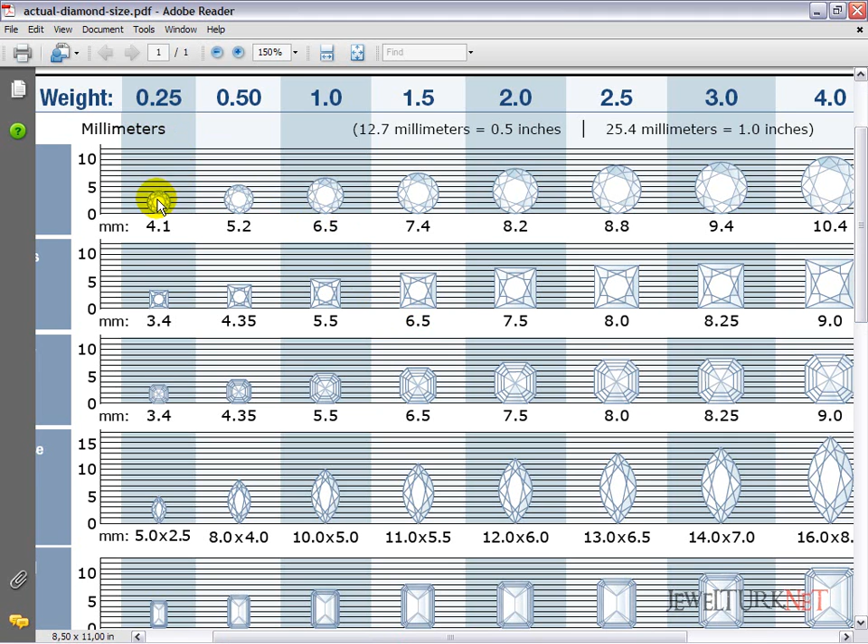First of all, we are going to use a quarter carat diamond. Its diameter is 4.1 millimeters. Here are diamonds, let's measure it. You see that it's 4.1 millimeter. Select the gemstone and hide it.

Open the front view. Open the snap button and take a point. We are going to mark the center of the work plane. Here is the center of the work plane. We can put the point to here. Now we can close the snap.

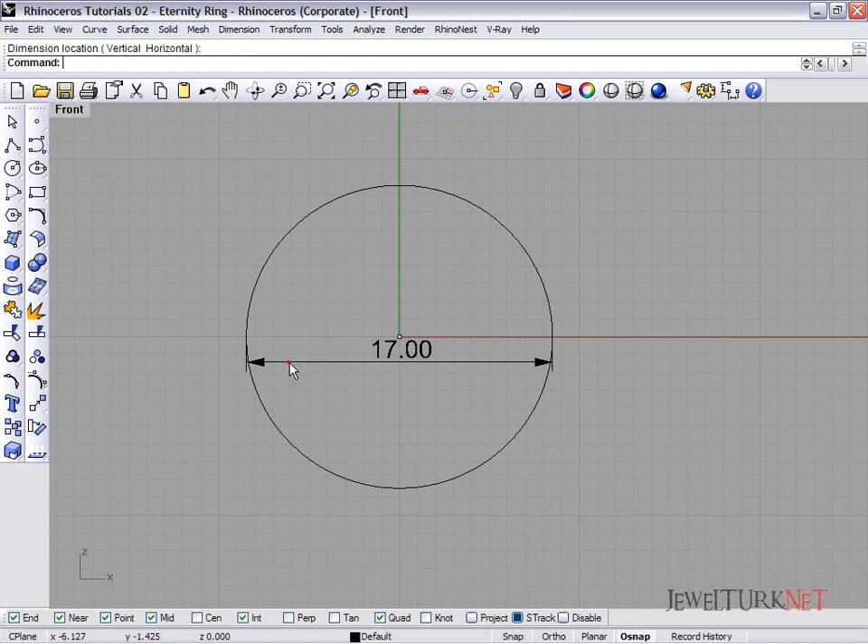Take a circle. Select the point and now draw about a 17 millimeter diameter circle. Select the circle. Offset it about 4 millimeters. Select the circle and offset it about 4 millimeters.

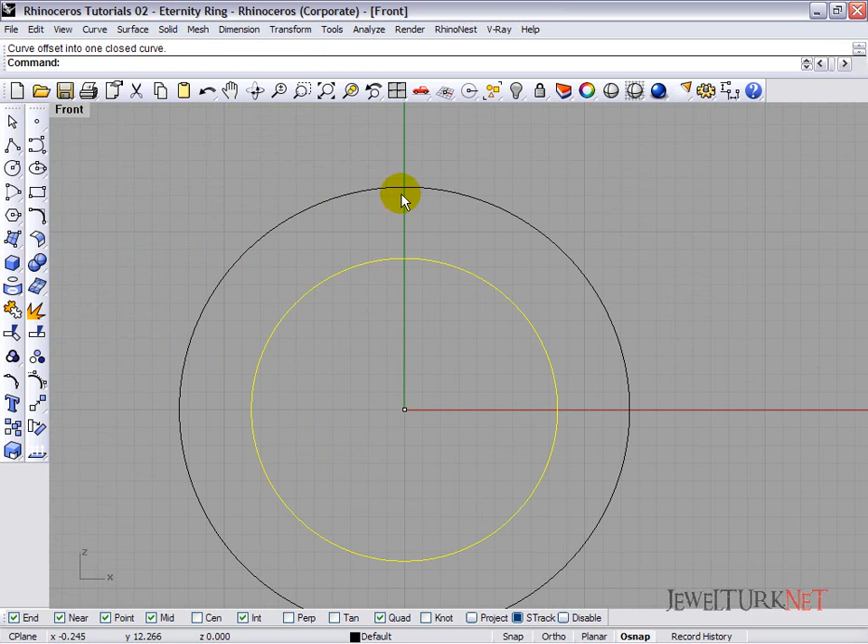Now show the gemstone, put the gemstone here, and then hide the gemstone again. Put a point to the quarter of the second circle and now we can delete this.

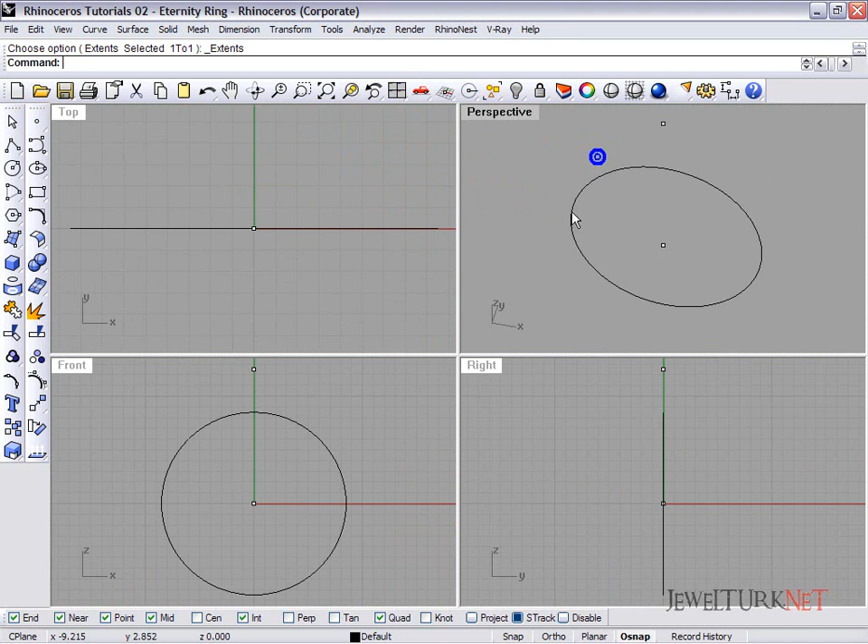Open top view menu, select circle, and draw from here a 4.1 millimeter circle. You can see that this diameter is equal to the diamond's diameter.

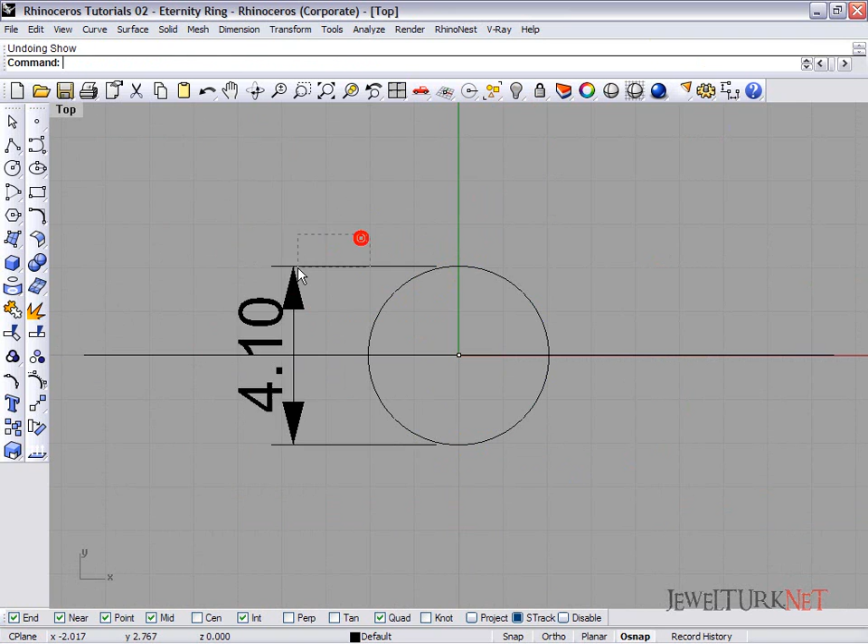Select the circle, click offset, and offset it about 0.2 millimeters. Now we can delete the first circle. Our prongs will start from the inner circle.

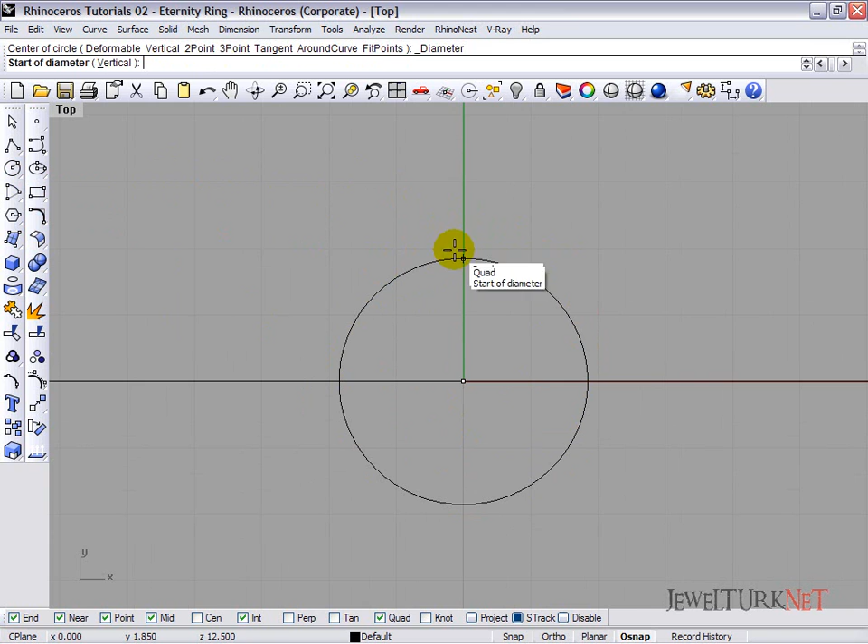Select the circle and write about 1.3 millimeters. Open center button and click point, and put a point to the center of the circle. Now we can close this center button.

Select this circle and point and click rotate. The center of the rotation will be the center of the work plane. It's about 45 degrees rotated.

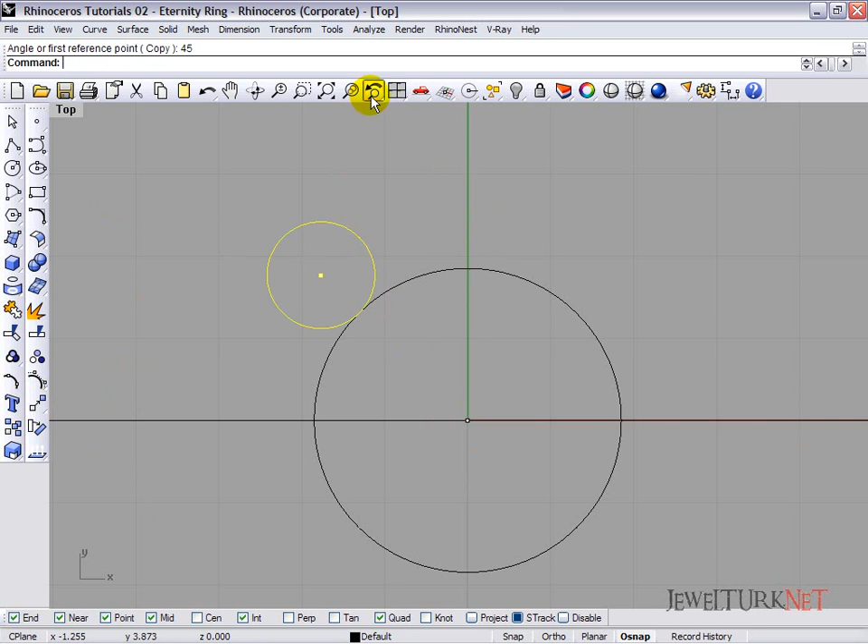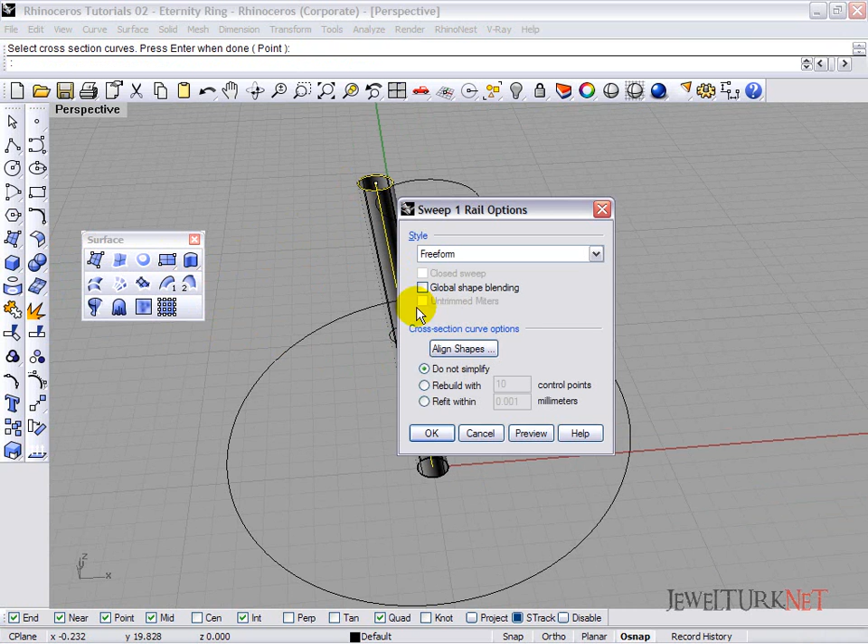Open the perspective view. Select line and click this point to this point. Now select this line. Open surface menu, select one rail with the circle. You see that it's a surface now.

Open solid tools menu, click the surface, then cap planar holes. Now it's a poly surface. Now one prong is ready, but we need at least 4 prongs.

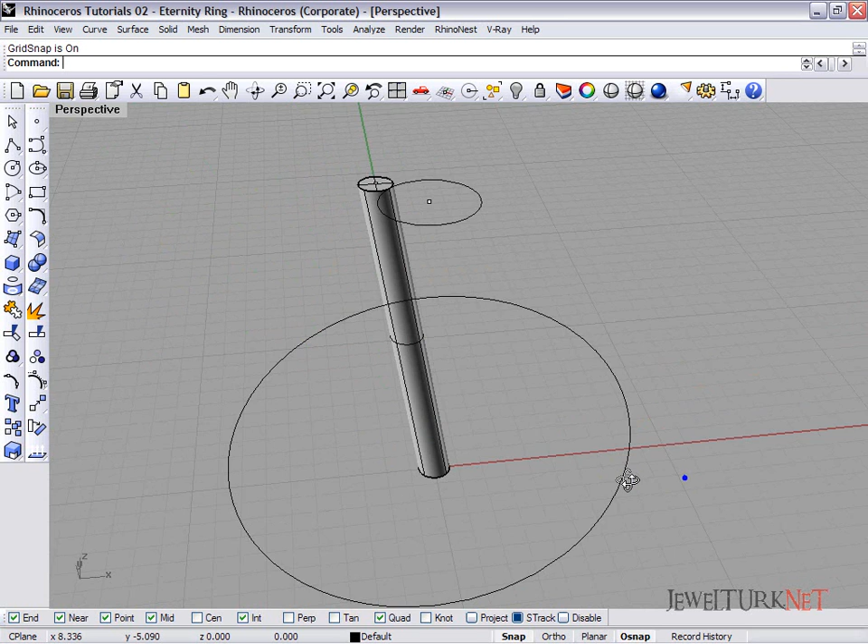Select this prong. Open the top view and click polar array. The center of the polar array will be this point. Number of items will be 4. Yes, here are 4 prongs.

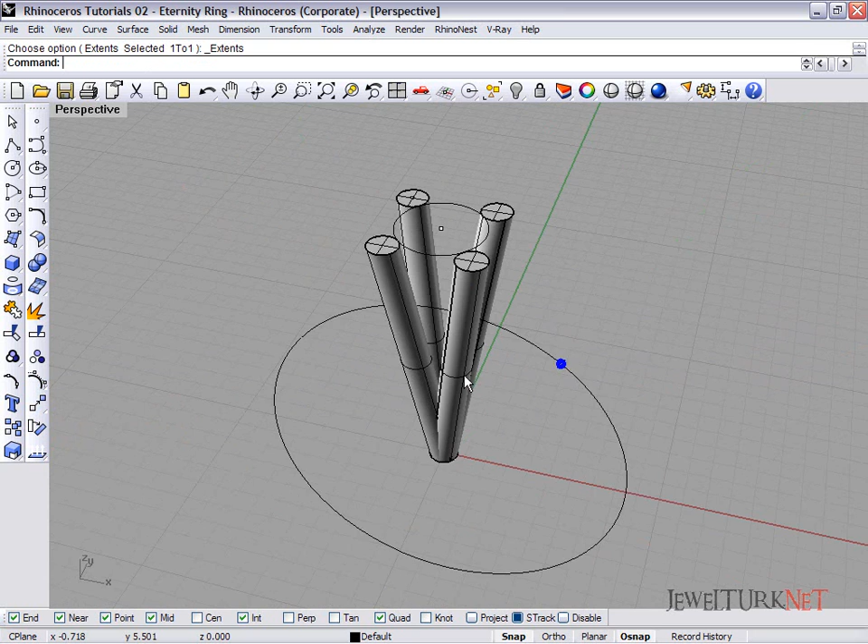And now we are going to do the support part. Open the front view, select the circle, click offset, and offset it about 1.7 millimeters. And now we can select the prongs and hide it.

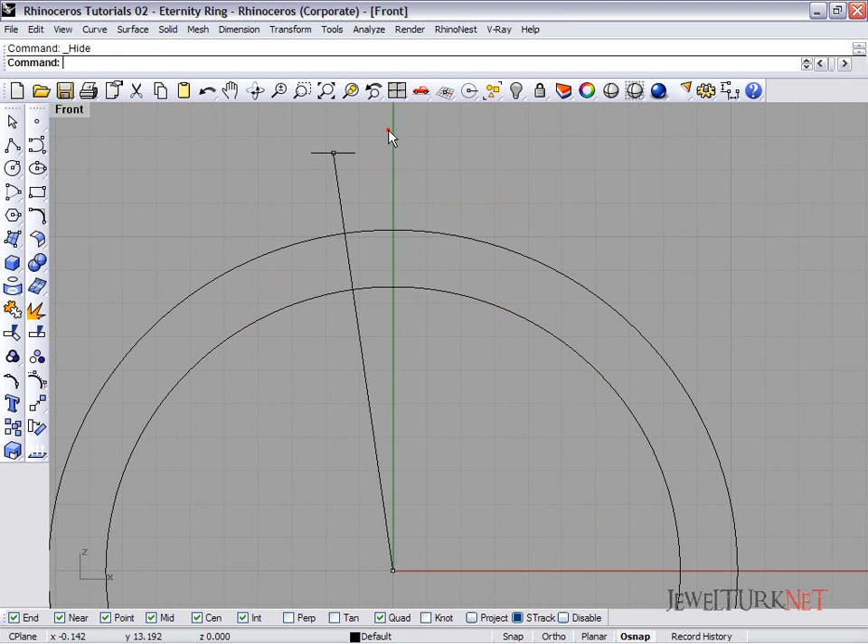We can delete these lines. Select the circle, show the prongs but select the gemstone. Select the circle, select the quarter of the upper circle, and then open top view.

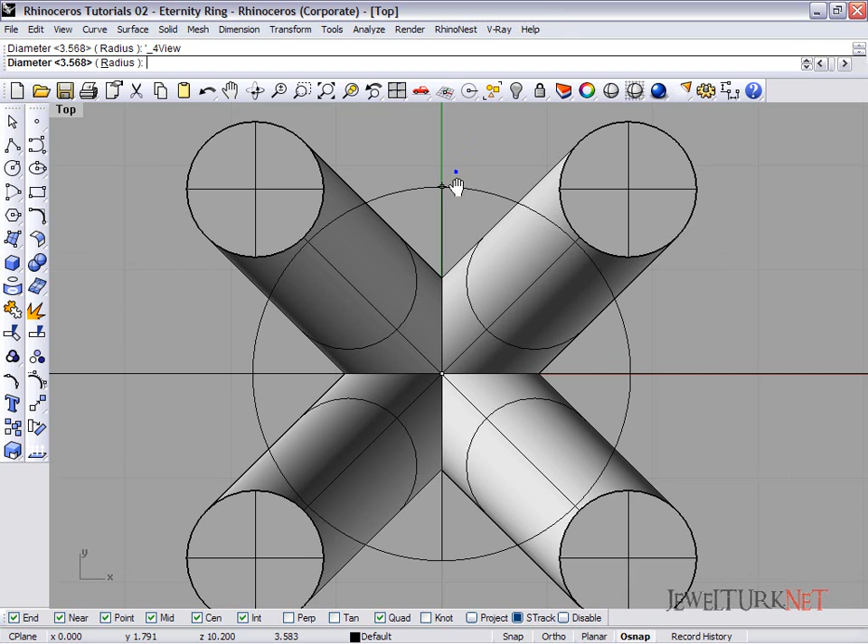We can click shift to make ortho button or ortho operation. Click about the circle, let's look about it. Yes, it's nice. Select the circle

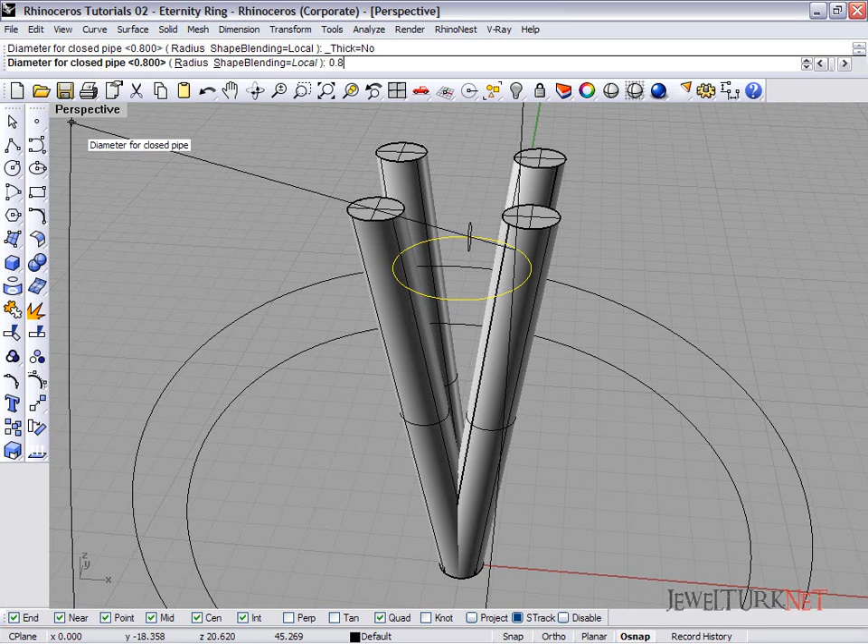and click pipe. Its diameter will be 0.8 millimeters. Show the gemstone, yes, it's very nice. And then we can delete the circle.

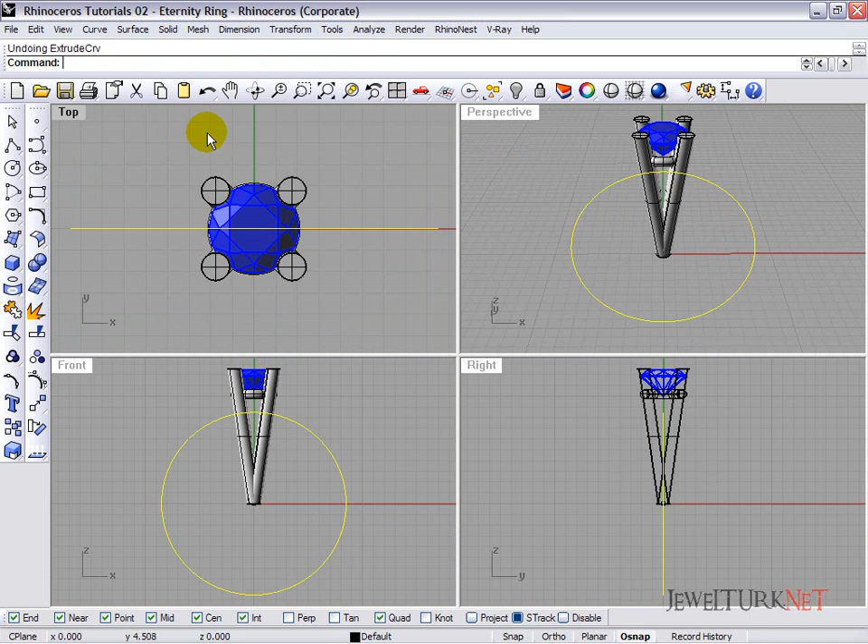Select the circle, open front view, and extrude it. When you are extruding, please be careful. Select both sides, yes, and cap button, yes.

Select all things except this one, the cylinder, and click Boolean difference from the prongs.

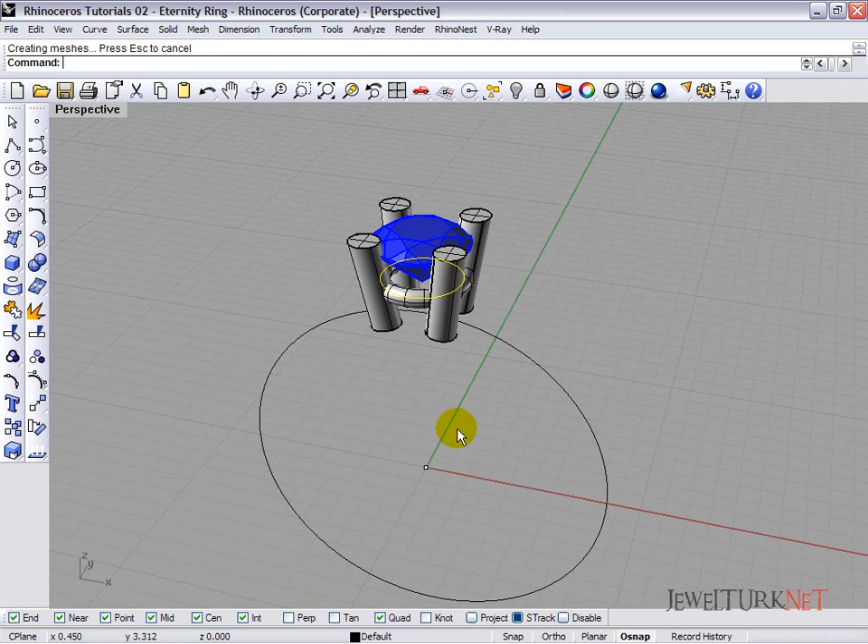Click four views, open the front view, and then select these parts. Open transform menu and select polar array. The center of the polar array will be the center of the work plane at here, and the number of items will be 16.

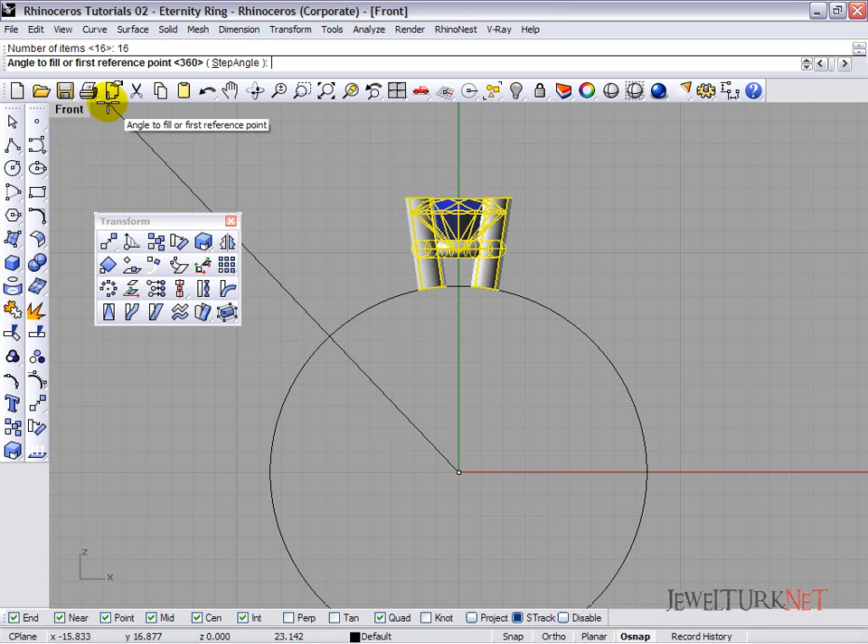Yes, it's very nice, but it didn't finish. Select the circle, click offset, and offset it about 1.75 millimeters.

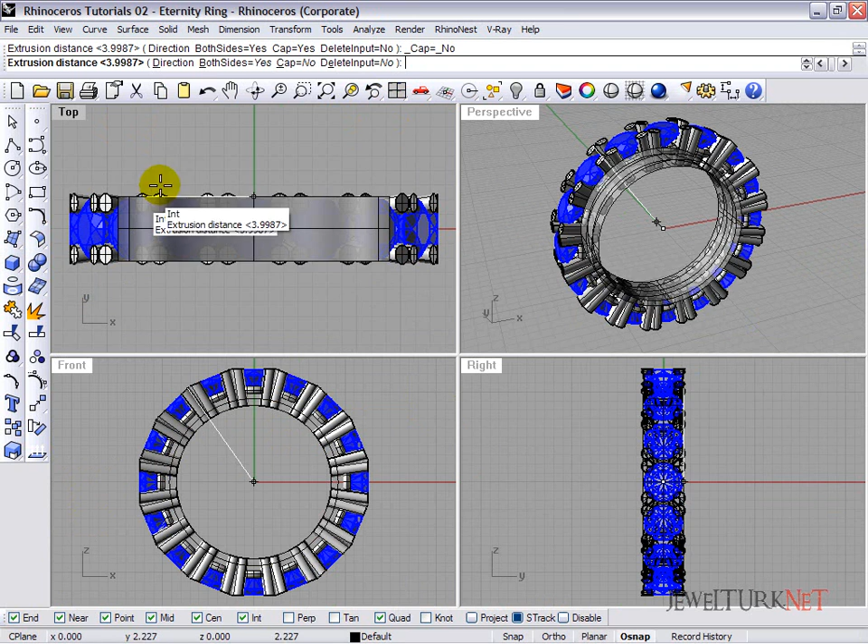Select two lines together, open front view, extrude, or you can delete this. Select extrude, select cap, and then write about here 1. It will be extruded about 2 millimeters.

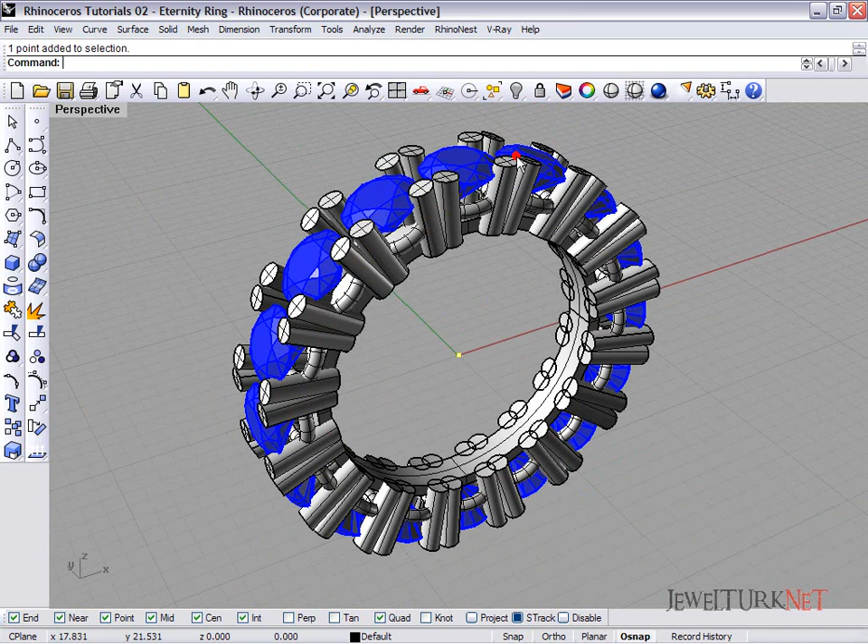Select all lines and then select all points. Yes, here is the eternity ring finished.